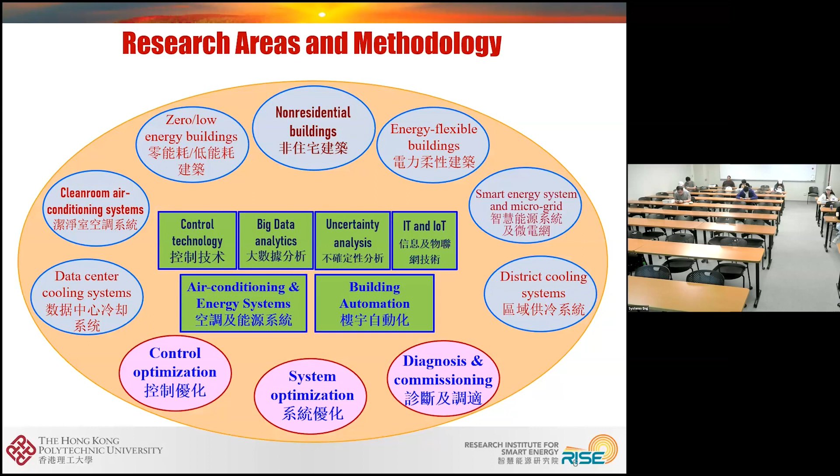So if we very quickly talk about the area of research - personally, I have a thermal science background in education, but my research is very much related to building automation. In terms of basic technology involved, we rely very much on control technology, data analytics, uncertainty analysis, IT, and IoT technologies. So you can find that the research is mostly multidisciplinary.

In terms of technology outputs, the technologies we develop concern mainly control application, optimization, system optimization, diagnosis, and commissioning.

In terms of the systems and buildings involved, basically we concern non-residential buildings, different types of non-residential buildings. More specifically, such as zero and low energy buildings, clean room air conditioning systems, data center cooling systems, and we also research energy flexible buildings, smart energy systems, microgrid and district cooling systems. So you can find that we have a rather big coverage, but basically we talk about energy systems.

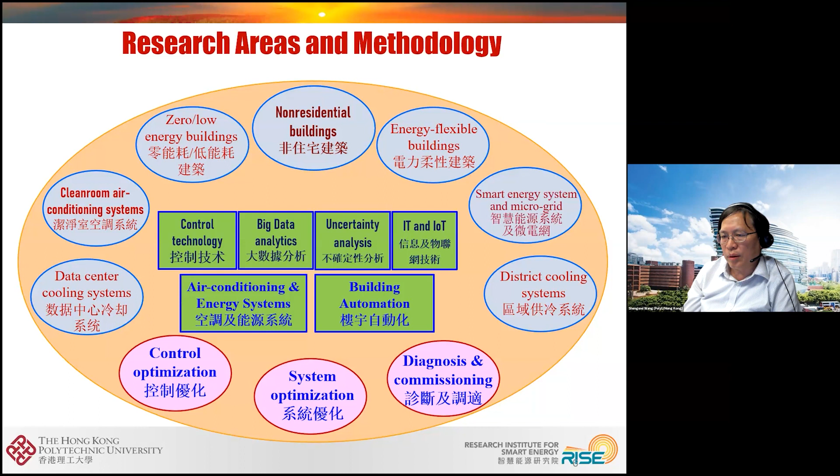We talk about the automation, the control of energy systems in terms of control optimization, system optimization, and diagnosis and commissioning. So actually what we are working on - we talk about energy efficient buildings, smart buildings, energy flexible buildings in the last 10 years.

So carbon neutrality - transformation of power generation is actually a key task for the carbon neutrality target. For instance, in Hong Kong, the carbon emission of power generation contributes to over 60% of the overall carbon emission. And among this, over 93% is the contribution of buildings. Worldwide, I think you know better than me, it's over 40%. If we talk about mainland China, the emission of buildings is over 51%.

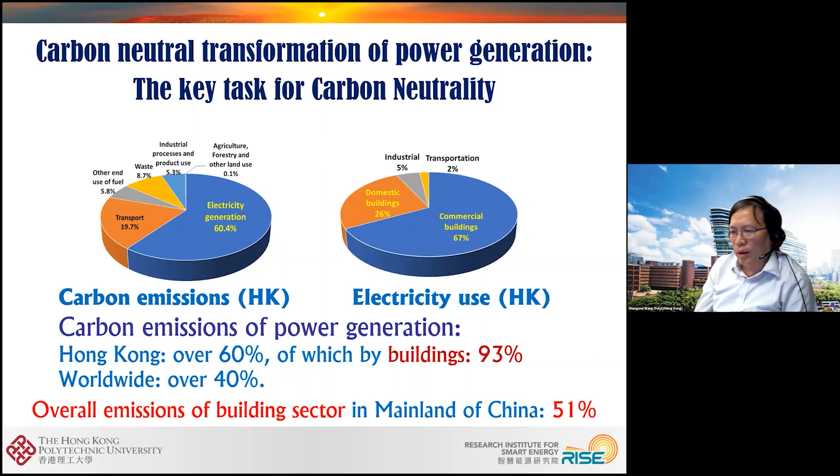So talk about the regular pathways for carbon neutrality in power sectors and the key problems. Traditionally, to achieve carbon neutrality we have two means: one is energy efficiency on the demand side to reduce energy demand, and another is more renewable generation at the supply side, and also probably the demand side. That helps solve the problem of achieving carbon neutrality.

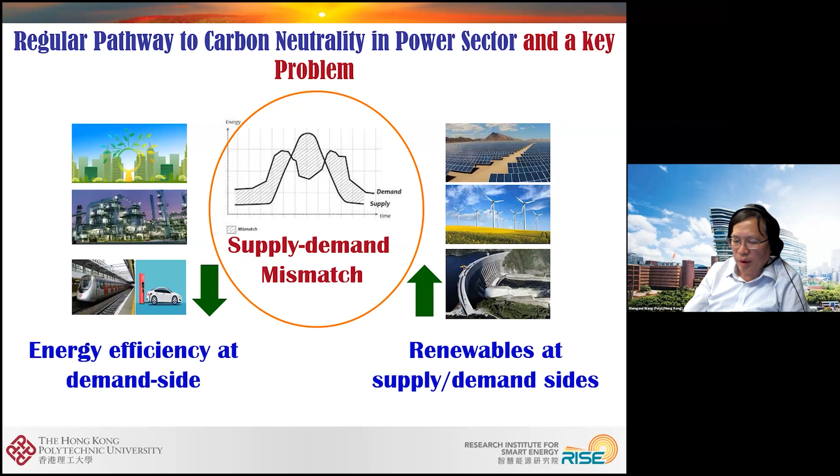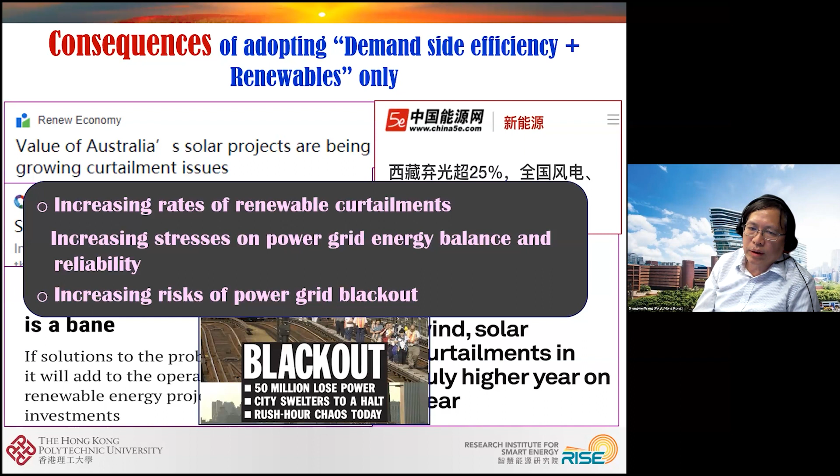But in the last few years, we realized it's not so simple to reduce demand and increase renewable generation on the supply side. Due to more renewable penetration, there are great challenges of supply and demand mismatch. We have to solve this problem, and if not handled properly, there are big issues including increased renewable curtailment, increased stress on the power grid, energy balance and reliability problems, and even the risk of power grid blackout.

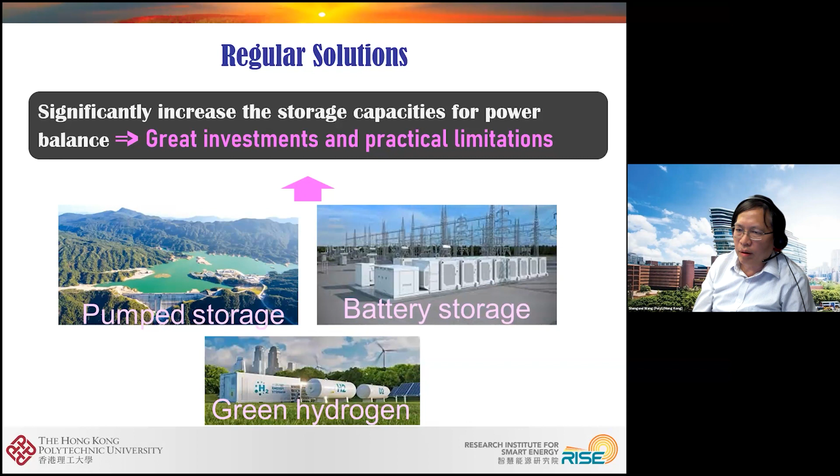The regular solution to this mismatch problem is to significantly increase storage capacity for power balance, meaning great investment with practical limitations. The basic means is to invest in pumped storage, battery storage, and green hydrogen. Those technologies are effective, but rather expensive, and sometimes technically or environmentally limited in development. So we need to look for more effective and low-cost alternatives.

That is actually on the demand side, with buildings as the main consumer, to contribute to power grid balance and reliability in a more cost-effective means. This means buildings not only increase demand-side efficiency and reduce load, but can also increase energy flexibility, contribute to power balance, and reuse more renewables in the buildings.

Therefore, energy flexible buildings and grid interactive or grid responsive buildings is a new term and a new means for buildings to contribute to the carbon neutrality goal. Energy flexible buildings are those which can reduce power use without unacceptable compromise in service quality when the power grid is short of power, and store energy when there is surplus power in the grid.

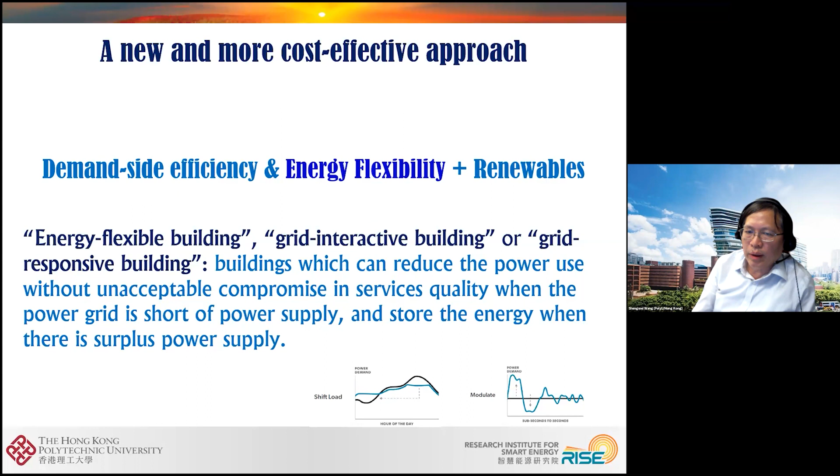Our research in Hong Kong focuses on very high density areas, so our focus is more on high density cities. For high density cities, how to achieve carbon neutral transformation of power systems is a big challenge—for instance in Hong Kong, Shenzhen, or other big cities in the Greater Bay Area and in the South and East regions of China.

So what are the contributions? Basically, it's to reduce energy demand and enhance grid power balance for higher renewable penetration. In buildings, particularly high-rise buildings in high-density cities, there is very little chance to adopt renewable energy generation such as solar PV or wind power. It's almost impossible, or only a very little percent of renewable energy can be adopted.

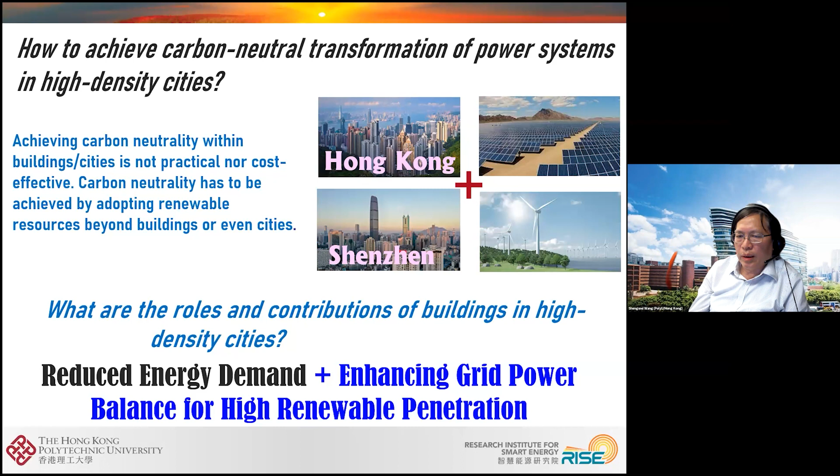So then, talk about the grid power balance needs at different time scales and the potential contributions of building flexibility. This shows the different flexibility services needed for the power grid—for instance, fast regulation and moderate regulation, which are very fast, in terms of seconds or minutes response.

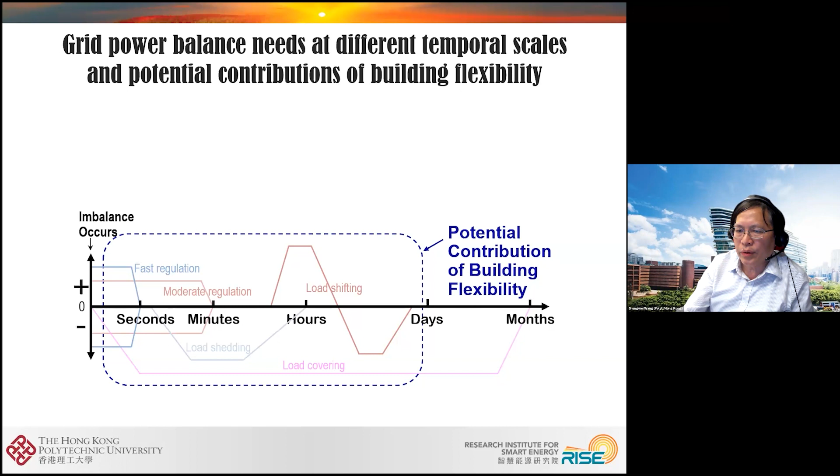For the slower or larger scale balance services required by the power grid, such as load shifting and even load covering, that takes something between minutes to hours, and for load covering, a period of months. Typically buildings are not so capable of providing this service because their storage capacity is limited, requiring a very large storage capacity.

So then we talk about our research and contributions in demand side flexibility. One basic work we do is demand side flexibility categorization—what we can contribute to power system balance and reliability for more renewable penetration in power systems: fast regulation, moderated regulation, load shedding, load shifting, and load covering.

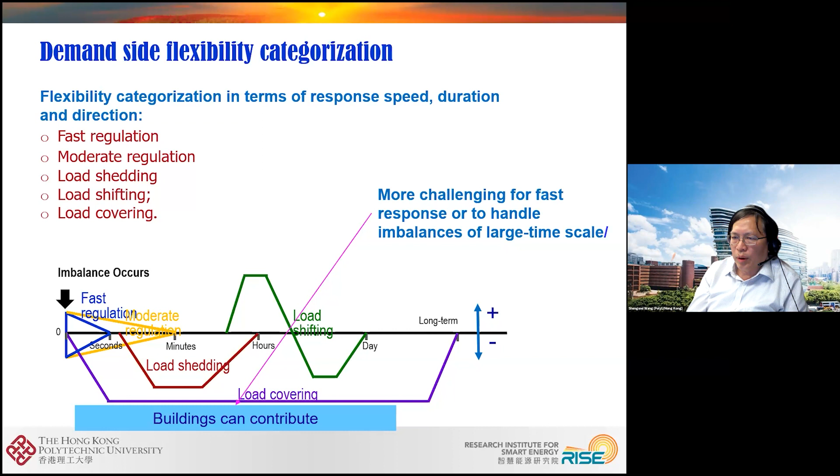You can find that in buildings, we can respond very fast to power systems, from seconds to minutes, and we are very good at responding to power grid demand at the scale of minutes and hours. So we can have much more cost-effective contributions for the service of increased power balance of the power grid.

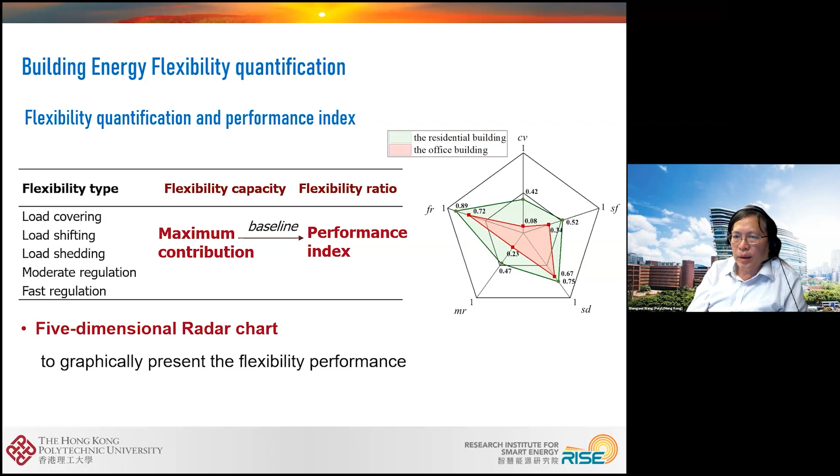This is the energy quantification index we developed. We propose a 5-dimensional radar chart to graphically represent the effective performance of different typical services, including the absolute flexibility capacity and the flexibility ratio of buildings.

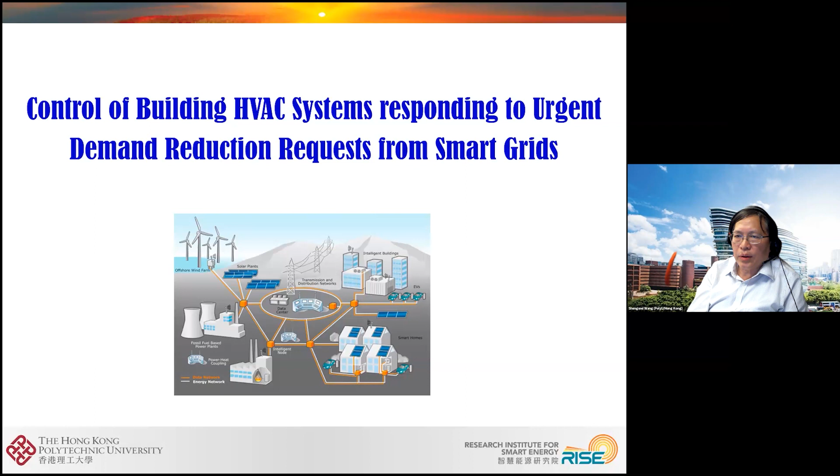We talk about energy flexibility technologies for contributing to power grid balance and high renewable energy penetration. For instance, we developed control methods for building HVAC systems in responding to urgent demand reduction requests from smart grid. So let's look at the conventional feedback control and the building demand response methods.

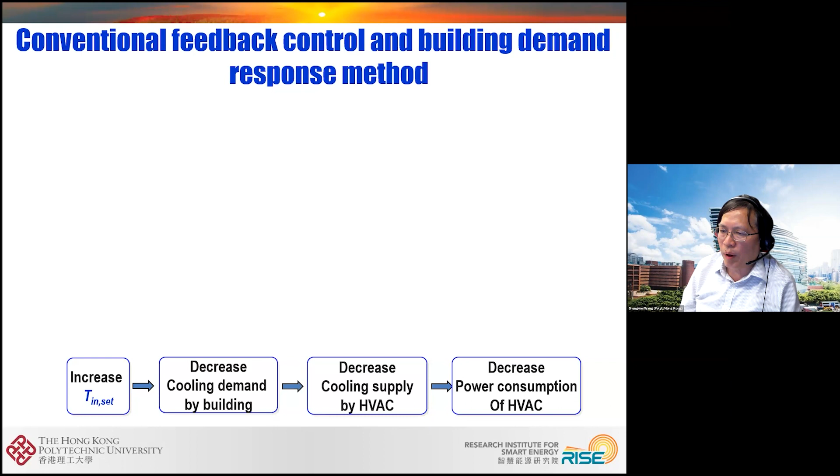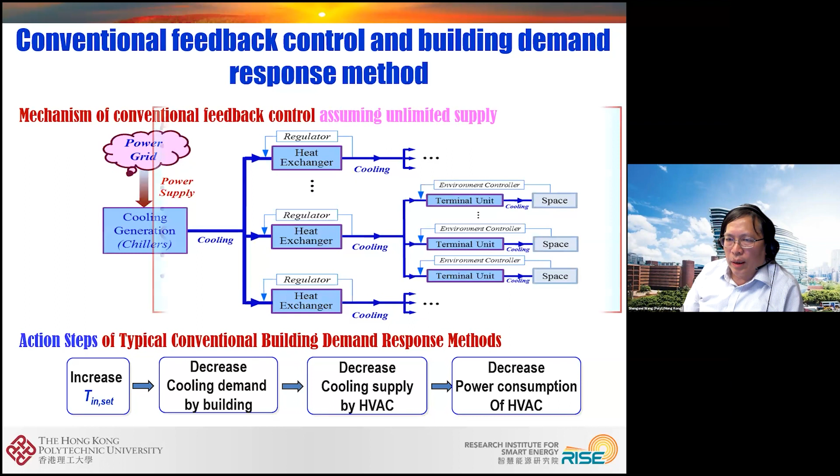For the conventional ways, we can do it rather conveniently. For instance, in the case of cooling systems, if it's a heating system we just reverse the control. In the case of cooling system, if we increase the set point of space, then the cooling demand of buildings can be reduced. Then the cooling supply of HVAC systems needed can be reduced, and eventually we can reduce the power consumption of HVAC systems and buildings. This way is rather easy, and conventional control can support this. The advantage is no additional thermal storage is needed, we can have original cost saving, and conventional control can be used.

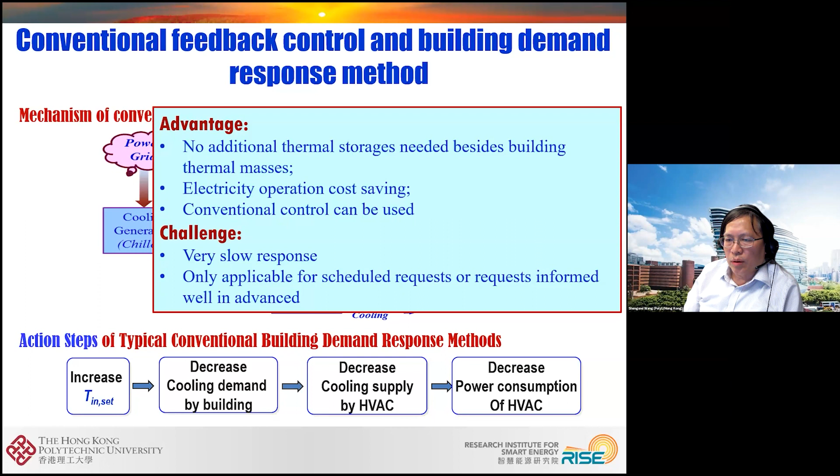But the challenge is very slow response. So it's only applicable for scheduled requests or requests informed well ahead. If the power grid has a very urgent response, and we have to respond very quickly, then this kind of control doesn't work because the response is rather slow.

So then we developed a fast demand response method by directly reducing the cooling supply, and we talk about direct load control from the viewpoint of power grid. This is a proactive method, and we can directly reduce the power consumption of chiller plants in the central system. At the same time we decrease the cooling supply to buildings, and then eventually the indoor temperature will increase. So with some sacrifice of thermal comfort, we can reduce the building demand, building load, to respond to the request of power demand reduction from the power grid.

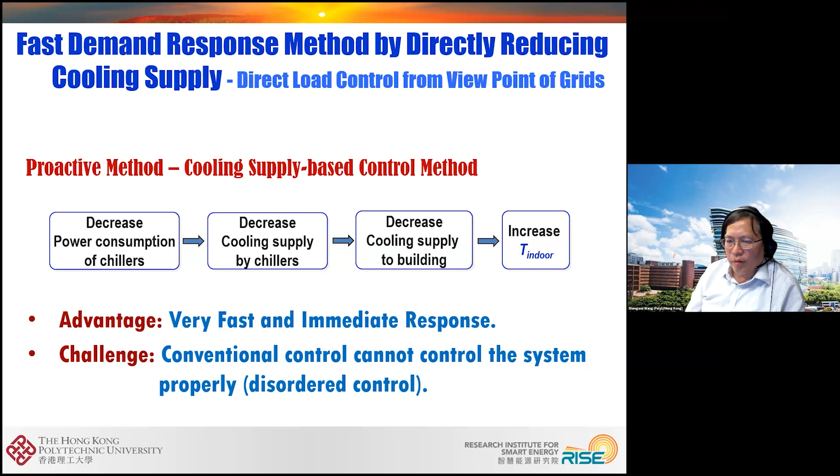In such a case, it's very fast, almost immediate response in terms of seconds. It very much depends on how information is transferred from power grid to buildings, and the response of building control systems can actually be handled within a few seconds. But the problem is the conventional control cannot control the system properly, and the system will have disordered cooling distribution. That is a problem.

For that, we developed methods to handle these problems. The solution is the cooling supply-based feedback control for fast demand response of buildings to smart grids. Basically, we developed distribution methods using the feedback from the average temperature of different rooms, and based on the average temperature of rooms, we feed back to distribute the limited cooling supply using a cooling distributor at the high level.

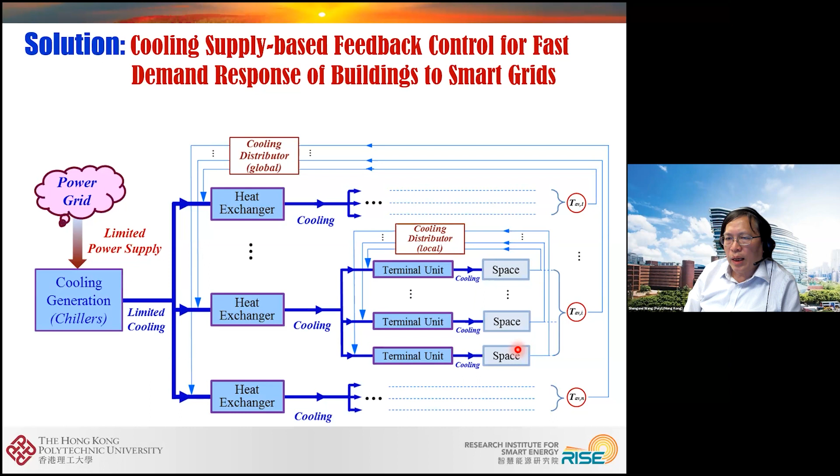Using the cooling supply at the distributor at the high level to distribute evenly as needed to different zones, then at the lower level, local level, we have another level of cooling distributor to distribute the limited cooling supply to different spaces. This allows the cooling distribution at different zones to be evenly distributed with even comfort sacrifice, and allows the buildings to have a reasonably long period of demand reduction as expected by the power grid.

Another technology we developed is the smart control of HVAC systems for enhanced building environment performance, providing frequency regulation services to smart grids. This kind of service in Hong Kong is not yet in the market, but in some European countries and some states in the US, this service is actually available in the electricity market, and the user side, the demand side, can actually provide this service to the power grid with some economic return from the power grid. So let's have a look.

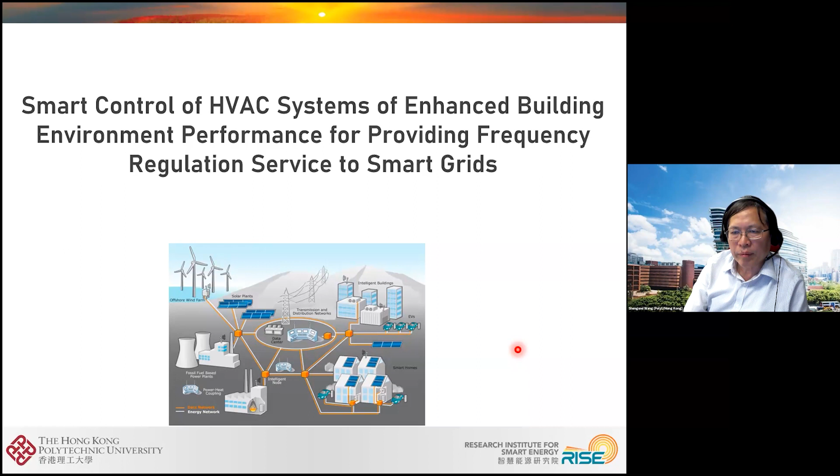Actually, by having the information from the power grid, such as different power market may have different ways to handle, but basically the power grid will give information to the demand side through the communication systems. If buildings have an agreement with the utilities, with the market operator, then we can provide the service and manage the demand and load of buildings in response to the control signal of the power system or grid.

So the main problem of providing these services to the power grid: one problem is whether we can control the building system to provide the service timely, at the right quality as required by the power system. Another important issue is that providing the service may have a significant impact on the environmental control quality of the building systems. That is the first problem.

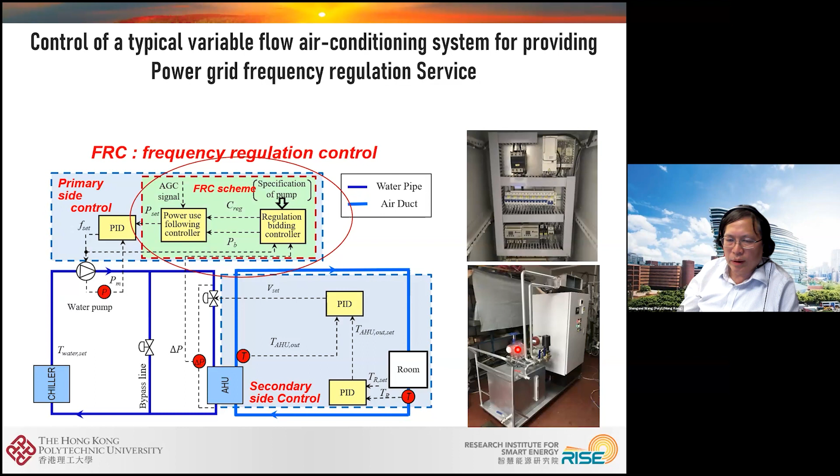The second problem is that this control disturbance introduced to the building system, such as the air conditioning system, may cause extra damage to the building systems because of more frequent regulation and action of the control devices.

So therefore, we developed a control enhanced with disturbance compensation for providing power grid frequency regulation services. So this part is the frequency regulation control.

The key point, if you are familiar with control methods in the control discipline, is that disturbance compensation is a very typical means for enhancing the control performance of control loops. But in this case there are two issues: one is to identify what the unwanted disturbances are, and the second is to find methods to compensate for the impact of those disturbances.

But actually, in the frequency regulation control of buildings providing the frequency regulation service to the power grid, this disturbance to the air conditioning system control is generated by ourselves. So we know what the disturbance is, we know this difference. So we developed a method we call the frequency disturbance compensation scheme, so we can compensate this disturbance.

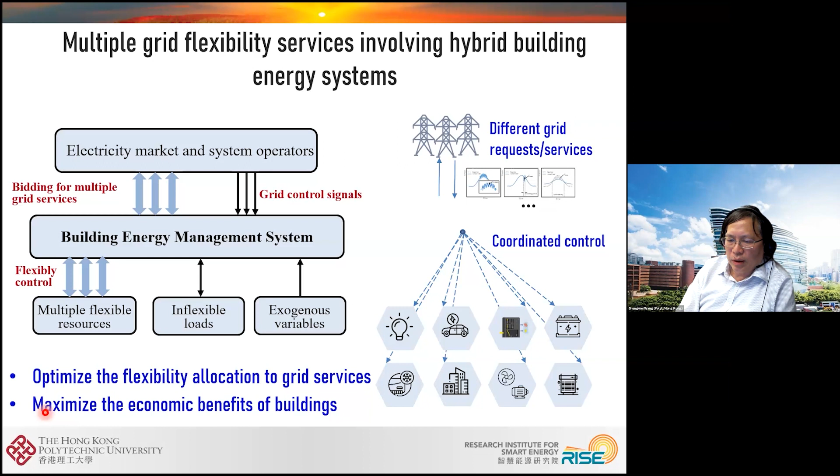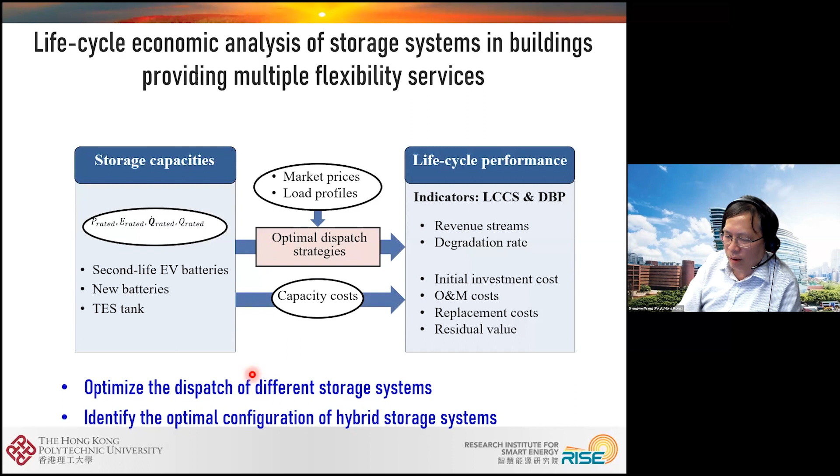Here we talk about new building development, and we also research how to enhance existing buildings, including the building district or building clusters. Another area of our research is business development for unlocking building energy flexibility towards multiple flexible services.

For the moment, I think in different countries, particularly in Hong Kong and in China, our research in my team started energy flexibility research, building energy flexibility research, for 10 years. But actually the development of power grid for engaging building demand side flexibility is rather new.

So our research also helps the power systems develop business models and how to engage the demand side flexibility services effectively, to have mutual benefits for the demand side participants and for the power grid.

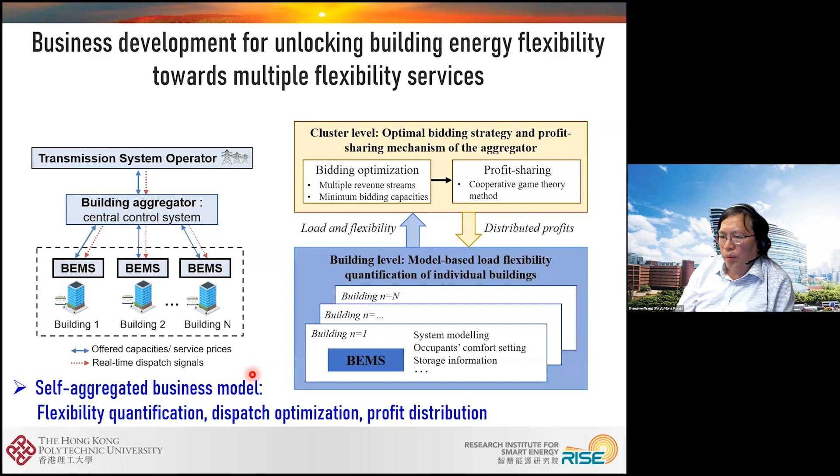Energy efficiency and smart building technologies is a long term focus, and we have actually been working in this area from the start of my academic career and from the start of my research team. So here I'll talk a little about what we are doing and what we did for smart and energy efficient building technology for reducing energy demand or reducing energy use in buildings.

So let me talk about our latest efforts. I'll use an example of a large project we got from the government to develop next generation key technologies for smart buildings. This is an ongoing project that covers much of our current research activities in the team.

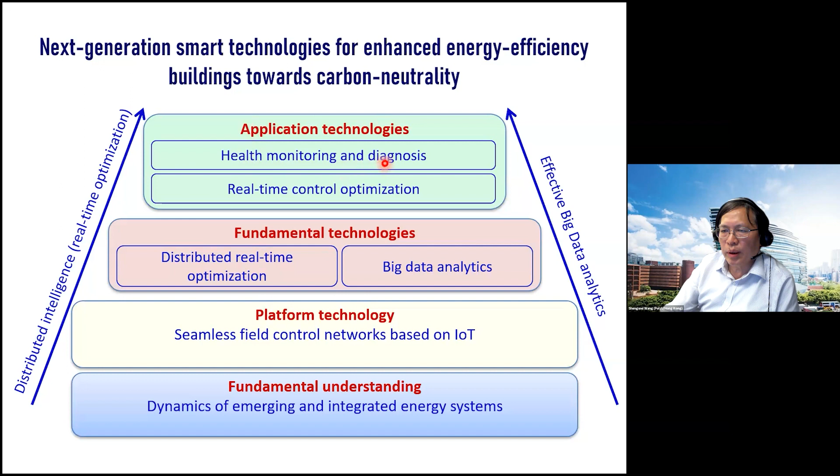We develop the technology in 4 layers: fundamental understanding to study the dynamics of emerging and integrated energy systems, platform technology to provide seamless field control network based on IoT, fundamental technology including distributed real-time optimization and big data analytics, and application technology including health monitoring, diagnosis, and real-time control optimization.

The research objectives, tasks and deliverables are grouped into 3 main areas: field level IoT implementation and optimization, big data analytics-based building health monitoring and diagnosis methods and technologies, and advanced control optimization methods and technologies. Let me show you a little bit of what we did.

In terms of field level IoT implementation and optimization, today's application of IoT technology in buildings is basically an effective, low cost means to collect information from the field. This information is transmitted to the cloud to make decisions, but those decisions are mostly not time critical because we send it to the cloud, make decisions, and send it back.

We cannot make time critical solution decisions that have to respond very fast using this approach. So for our development, we developed an IoT-based field control network or system using wireless networks for HVAC field optimization.

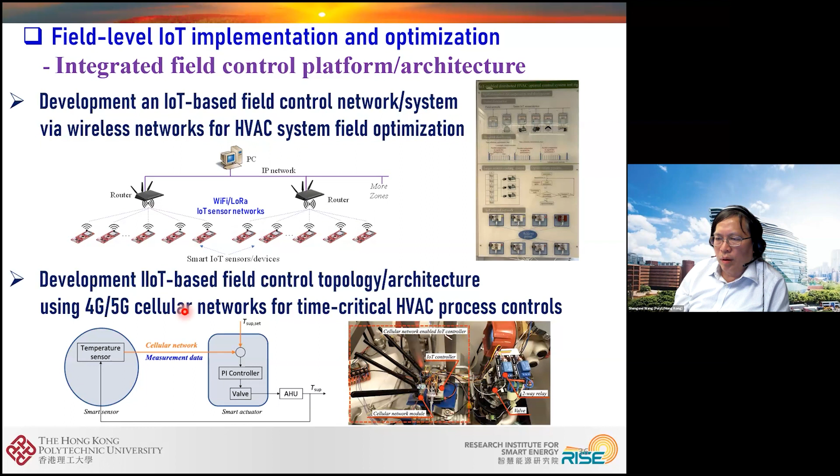Another area we developed is distributed optimal control methodologies for HVAC systems. The basic idea is that today's optimal control mostly requires collecting information from field control devices, sending the data to a higher level to make control optimization decisions, because local control computational capacity does not support it.

Another issue is that the program environment cannot support very complicated optimization software or routines to be implemented at the field level. But if we make use of distributed computational resources, such as IoT devices or field control systems, the question is how to use this kind of computational resource at the field level.

So we developed distributed optimization methods for building systems. One part is decomposing large optimization problems into sub-problems of smaller scale. We develop effective and robust online optimization methods that use distributed computational resources, such as IoT devices and field controllers, allowing the problem to be distributed across different controllers and IoT devices.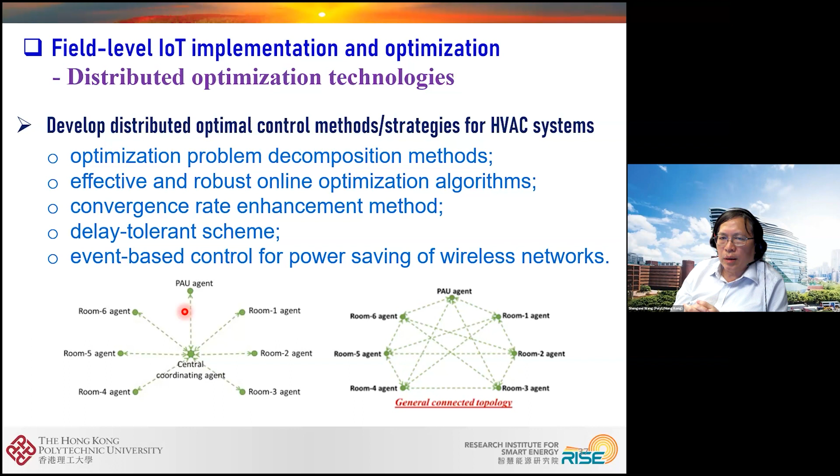We coordinate these routines distributed across different small field devices. If we can ensure convergence and tolerance, and use agent-based or event-based controls, this allows big optimization problems to be handled in distributed IoT devices or field controllers to achieve distributed optimization of HVAC systems in particular.

We also developed a big data analytical framework based on domain knowledge and machine learning for analyzing big building operation data. We integrate building information (BIM), IoT, and building automation system information to provide health monitoring and diagnostic functions for buildings.

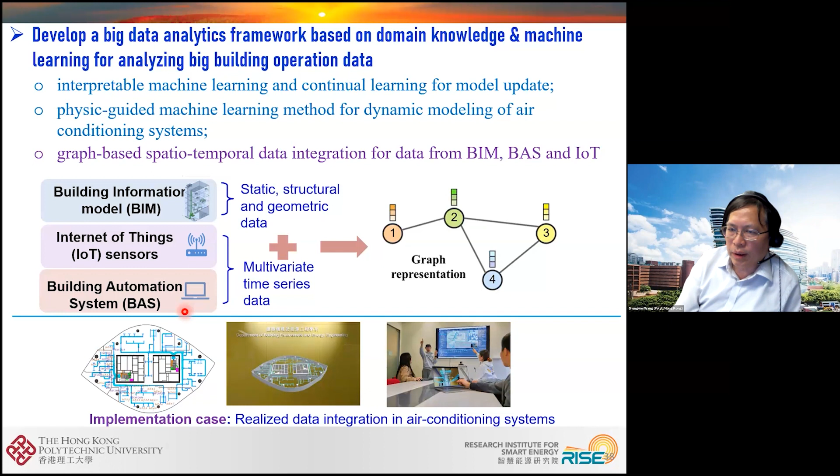This work is led by a young colleague in the team, who developed automated data-driven health monitoring and diagnosis strategies for air conditioning systems as well.

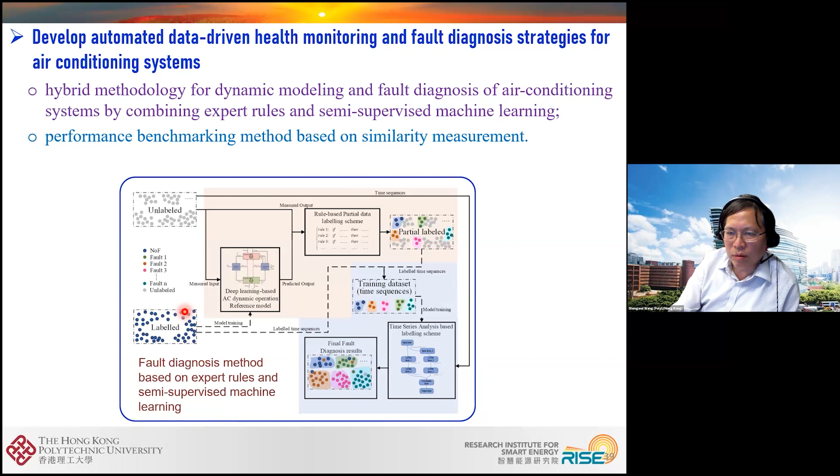We also developed advanced control optimization methods and technologies. For instance, we developed AI-enabled smart field controllers for integration with conventional building automation systems. These controllers have AI software tools and routines embedded in them, allowing them to integrate with conventional building automation systems through open network protocols.

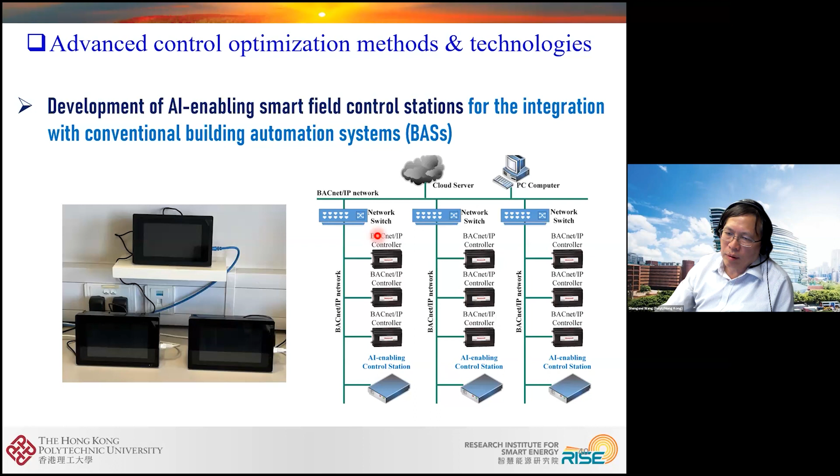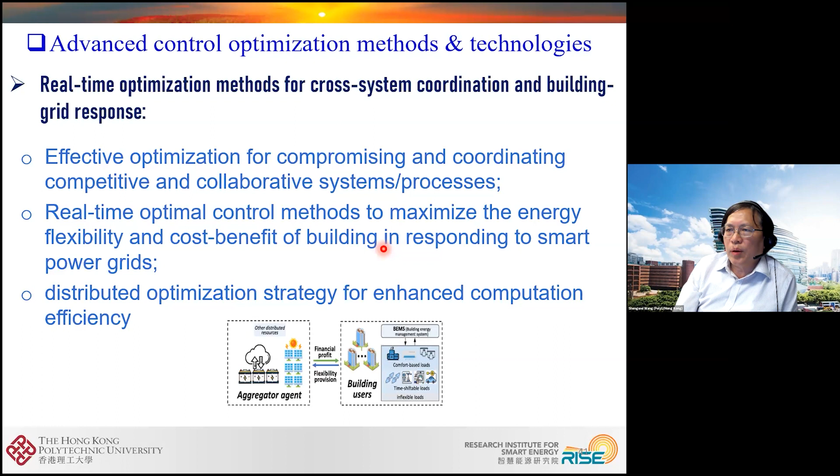So we also developed a real-time optimization method for cross-system coordination and building grid response. And finally, I'd like to report to you that...

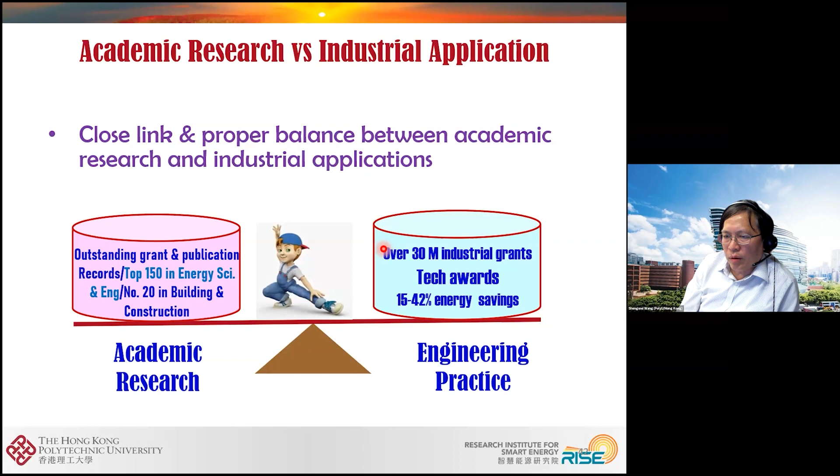Something I'm proud of for my team is that we have a close link and balance between academic research and industrial applications. In terms of academic research and engineering practice, we have over 30 million in industrial grants and technical awards, and we achieved many building application projects, saving between 15% to 42% energy in actual buildings.

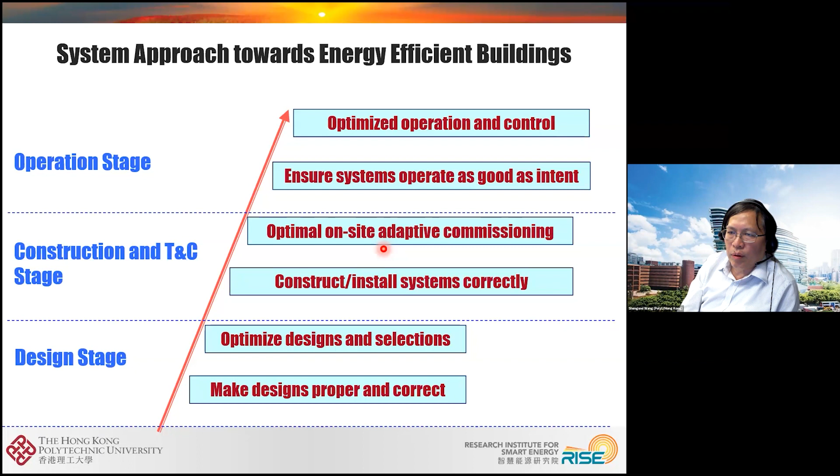Here I show you the technologies we developed based on the research outputs. We have developed a system approach towards energy efficient buildings, with technology supporting the design stage, the work in construction and T&C stage, and the operation stage for optimized operation and control.

In a hotel, we helped them optimize the energy system and control, achieving a saving of 25%.